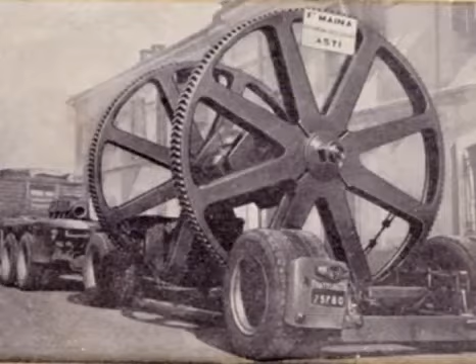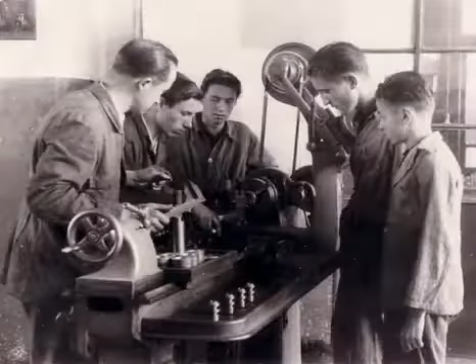After starting out as producers of analogical machinery and instruments, dedicated to local needs, it rapidly increased its own productive horizons, from the motorization of the new industrial plants to the building of systems for material handling, tool-making machines, and whatever else has an affinity with automation, concentrating its own interests more and more in the field of power transmission equipment.

This vocation brought the company over the years to its present high level of specialization in this specific field. Today, MAINA S.p.A., known all over the world, is capable of designing, manufacturing and commercializing mechanical components for power transmission of large dimensions and very high quality.

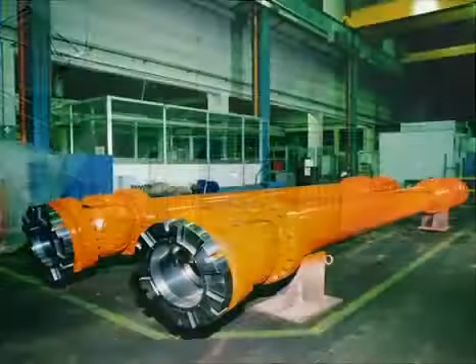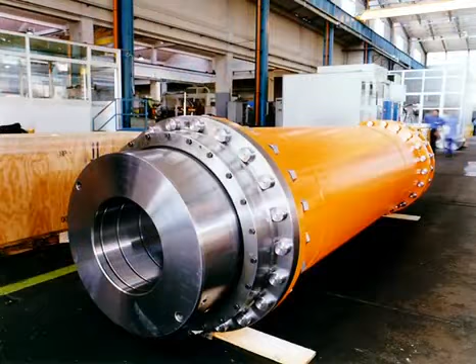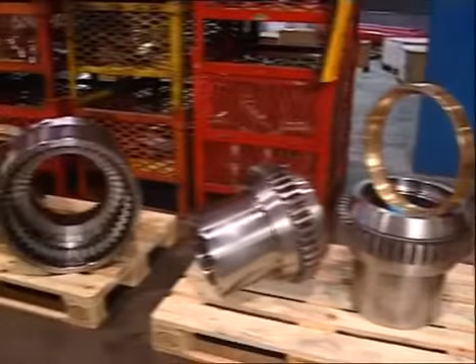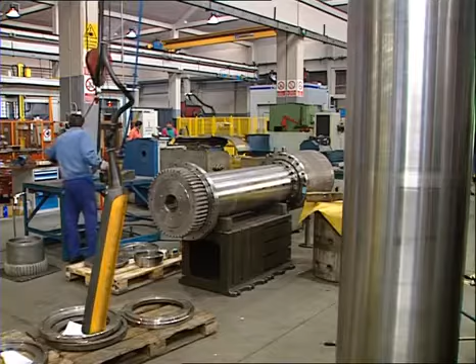The range of products, whose weight can vary from a few kilos to several tons, is represented by crowned gear flexible couplings, universal shafts, fixed and telescopic gear spindles, manufactured in all the possible typologies and technologies. Since 1994, its structure and its operating procedures have been certified by Det Norske Veritas in accordance with UNI EN ISO 9001 standards.

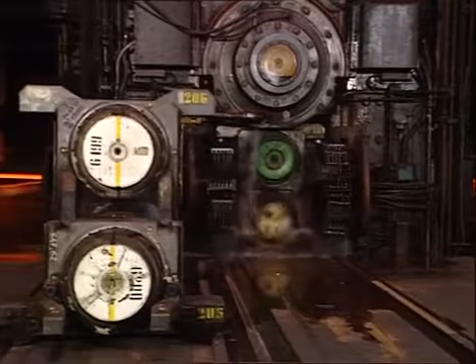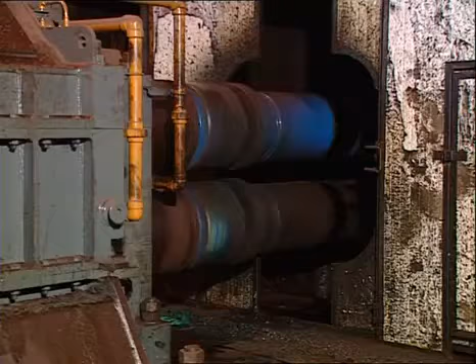The most challenging of MAINA's products are made for the fields of both hot and cold steel mills. So as to obtain better and better performances both in terms of duration and resistance to loads and high temperatures, these products are continually updated in collaboration with plant manufacturing engineers and maintenance managers.

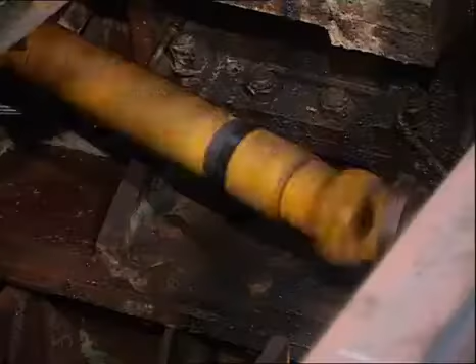An always deeper and up-to-date technical knowledge of the plants and the operation of gear couplings, universal shafts and gear spindles permits us to offer our clients the necessary assistance in resolving any type of problem relative to the power transmission.

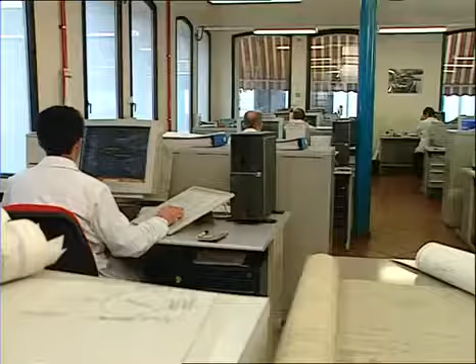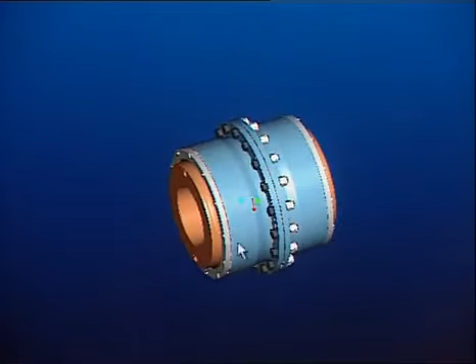Our engineering department uses a system of bidimensional and tridimensional CAD design. The projects are elaborated for future modifications of existing models and their base parameters so as to guarantee the functional characteristics and the nominal load capacity of the products. Structural calculation checks are carried out by a specific CAD 3D station fitted with finite element modeling.

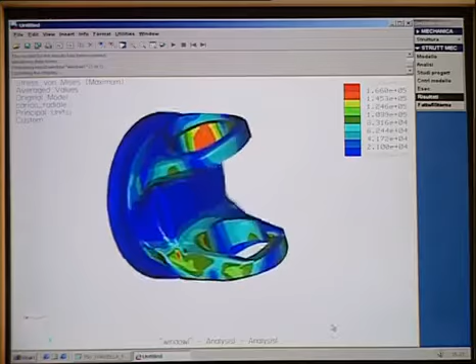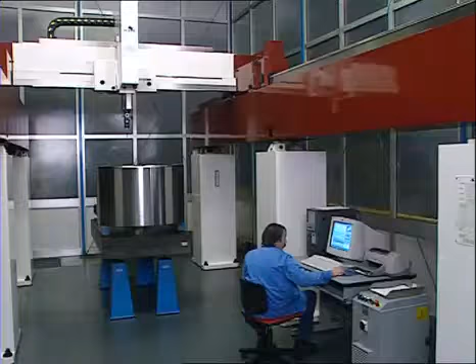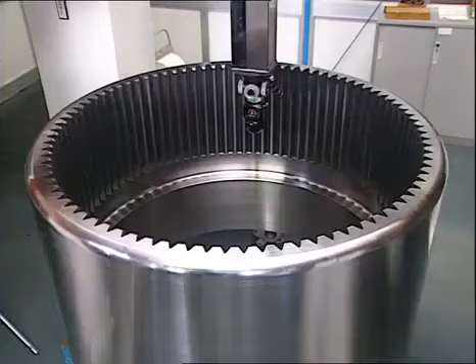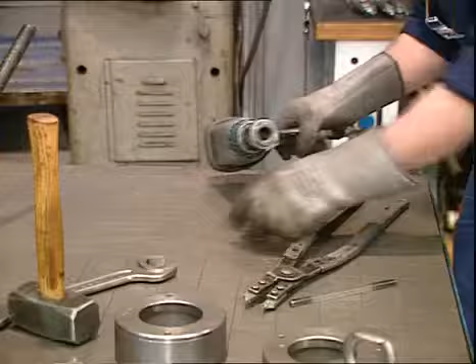The reliability of the final result is guaranteed by an accurate knowledge of the production process and by the possibility of a correct control and management in all its phases. Precise and punctual controls are carried out from when the raw materials arrive through the various working phases: assembling, balancing, anti-corrosive protection, and then packaging and shipping.

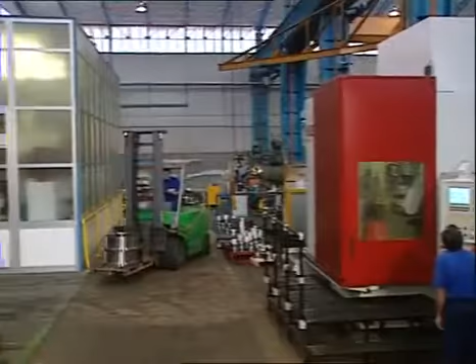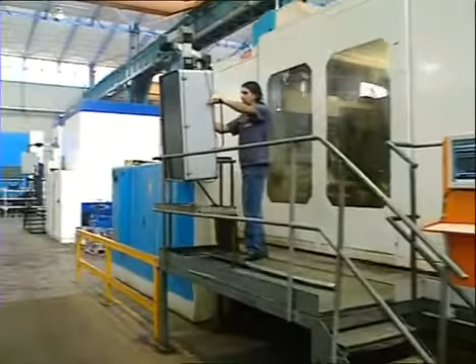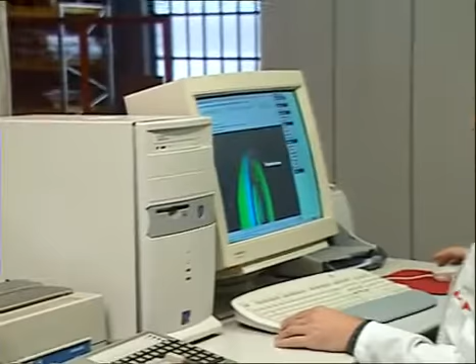The tool-making machines are exclusively of the CNC type, with automatic tool changes. A CAD-CAM 3D system, starting from the 3D files of the drawings, elaborates the operating programs for the CNC machines. Large dimension items can be turned on a vertical turning lathe, equipped with electromandrels for inner grinding, while long length shafts can be turned on a parallel lathe equipped with a device for deep drilling.

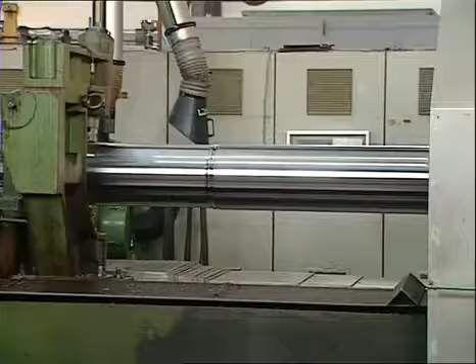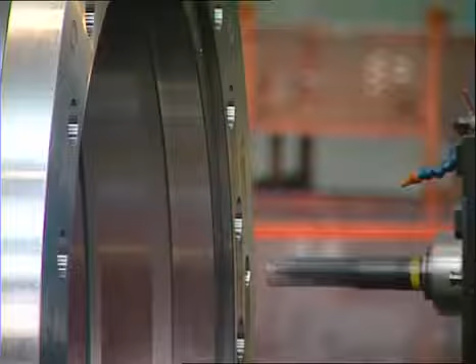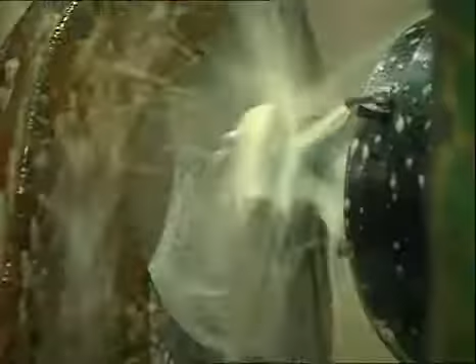The boring process is carried out both on a turnable upright machine equipped with a rotary translating table with a horizontal mandrel, on a fixed upright palletized machine, and also on a fixed upright machine with a 5-station unit and a vertical horizontal universal mandrel.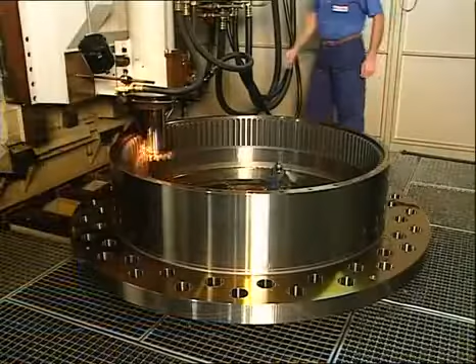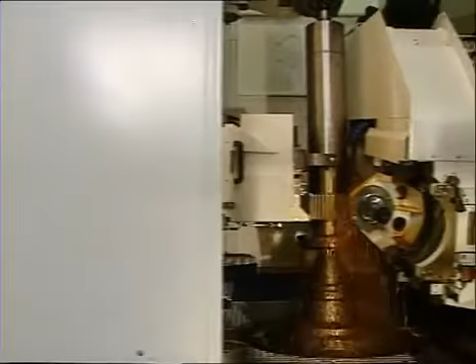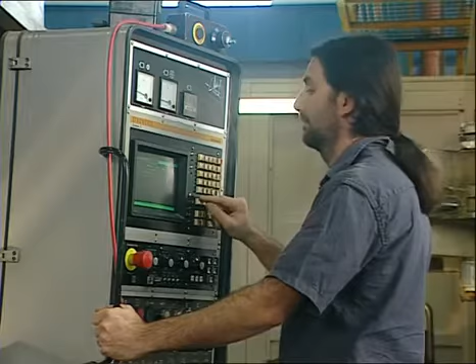In the toothing department, there are numerous inner and outer gear cutters, as well as a special vertical gear cutting machine for toothing shafts up to a length of 2.8 meters. So as to obtain very high precision, special steel gears with a high degree of surface hardness are ground on 2 special machines equipped with their own surveying and measuring instruments.

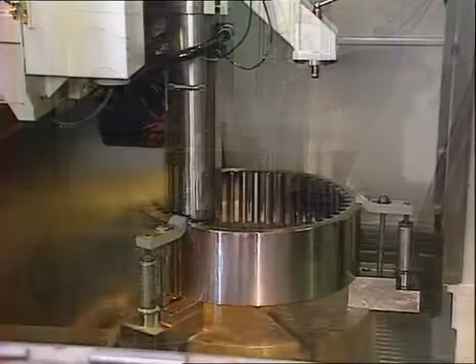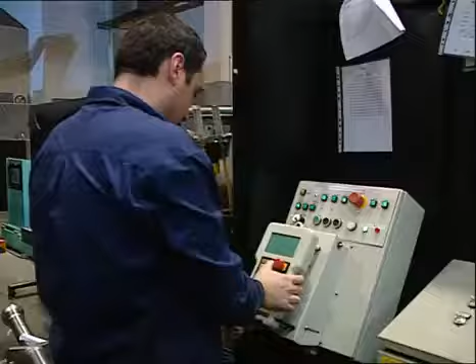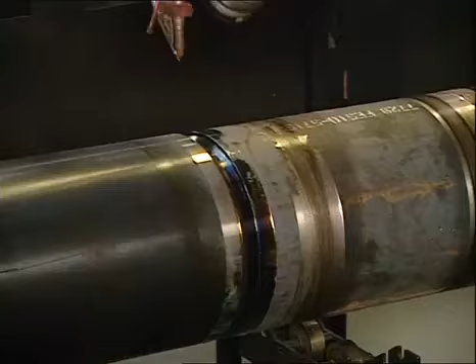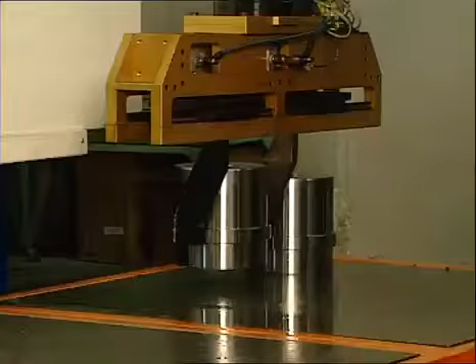In the robotized welding department, very high constant quality special welding is produced. In the robotized center for the production of standard gear couplings, hubs and sleeves are produced in batches of thousands of items, starting from the hot-pressed raw materials. Every machine in this department is automated and interacts with its relative latest generation robot, carrying out all the pickup, placing, tool cleaning, locking, unloading and pieces palletization operations.

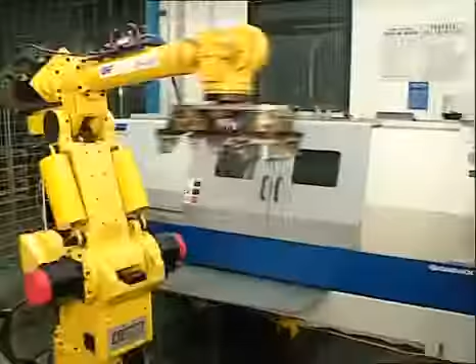MAINA works worldwide, and in a market where there are few qualified competitors, is able to offer the best possible solutions, concentrating on the quality of the product and the service with a reasonable price-performance relationship.